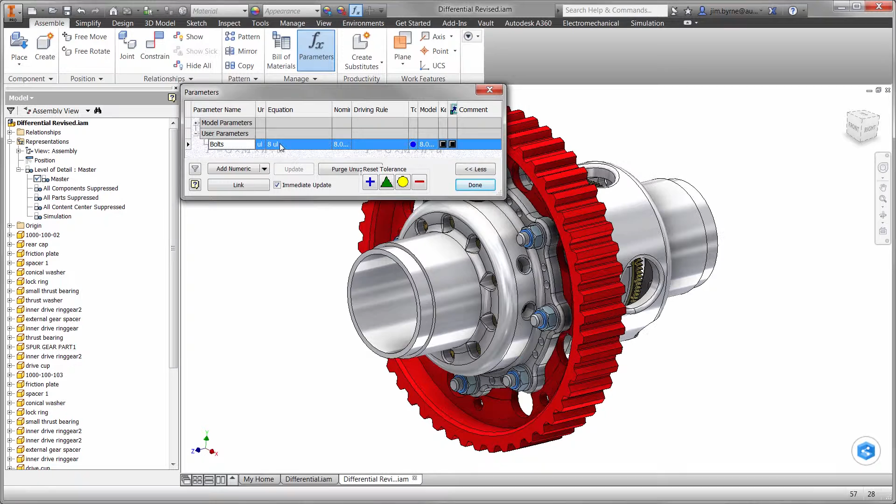First, we will reduce the number of bolts from 12 down to 8. Then the setup for the analysis is simple. We will constrain the center of the hub, which prevents it from moving. Then apply a total force to the teeth on the gear of 5,000 newtons. Next, we have the bolt connectors.

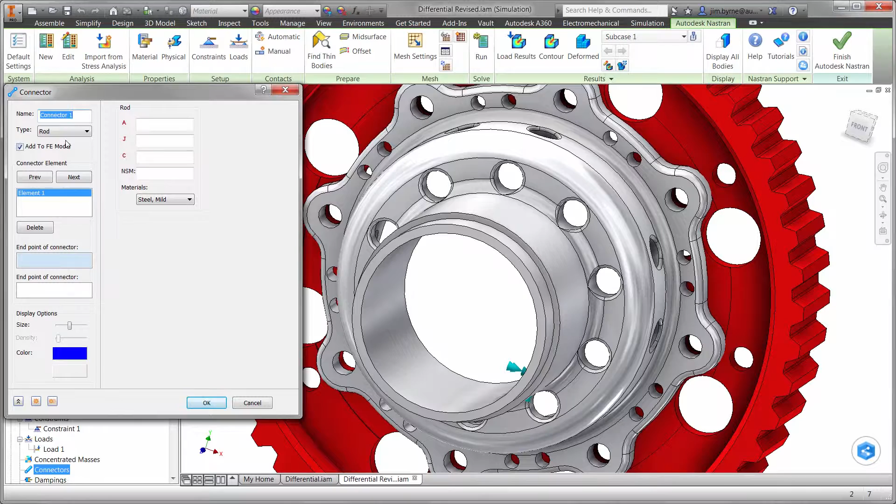There are two options when analyzing designs that have fasteners. First, the 3D models can be left in the study and they will be meshed as solid elements like the hub and the gear. This option involves a lot of work setting up proper contact conditions as well as lengthy solve times. The second option is the use of connectors. They take less time to set up and solve several times faster than solid bodies.

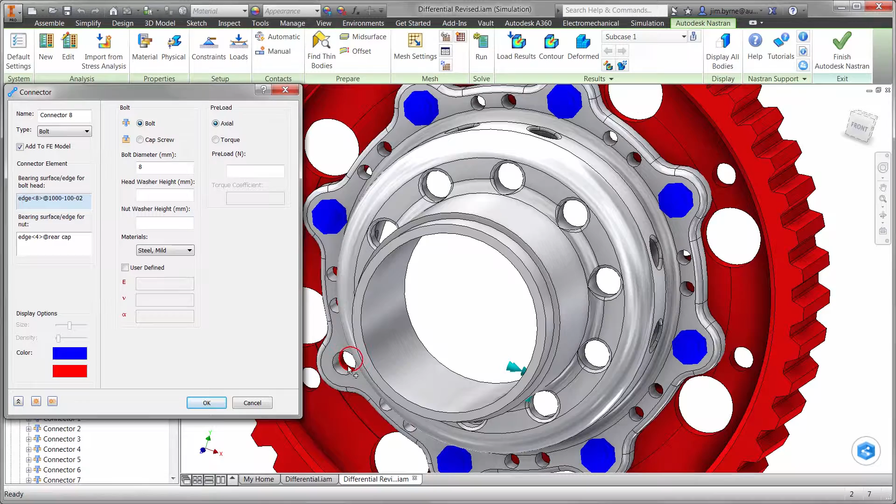As you saw earlier in the video, they also provide results like axial and shear forces on the bolt, and that is exactly what we need to know. Notice the results take into account the material and preload, providing the information we need to make informed design decisions. Now let's generate the mesh and run the solver.

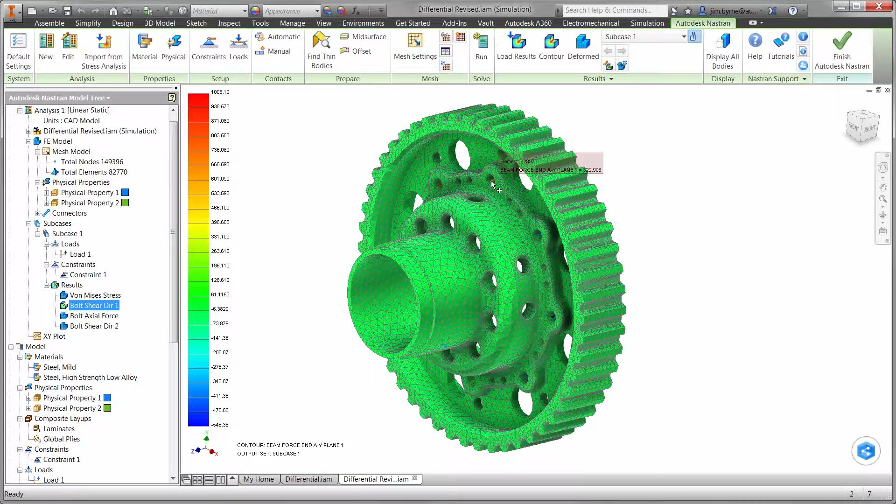Just like the previous design, we will begin with the axial force on the bolts. It looks like the worst case is slightly higher than the 12-bolt design at 73 newtons. Nothing to be concerned with there. How about shear? In direction 1, we have 322 newtons. And in direction 2, we have 1,588 newtons. Now is the moment of truth. Will the 8 bolts be sufficient for this design?

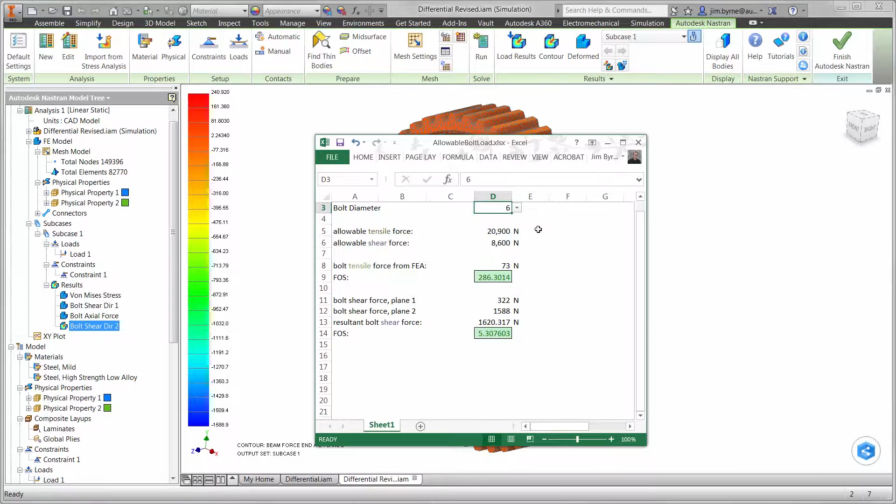The results show the 8-bolt configuration is going to be enough. What about the size? Let's try 6 millimeters. We may even be able to save on size as well with a factor of safety above 5. As you have seen, we are able to run quick what-if scenarios to find the best design possible for the differential, all before a single prototype is built and tested.